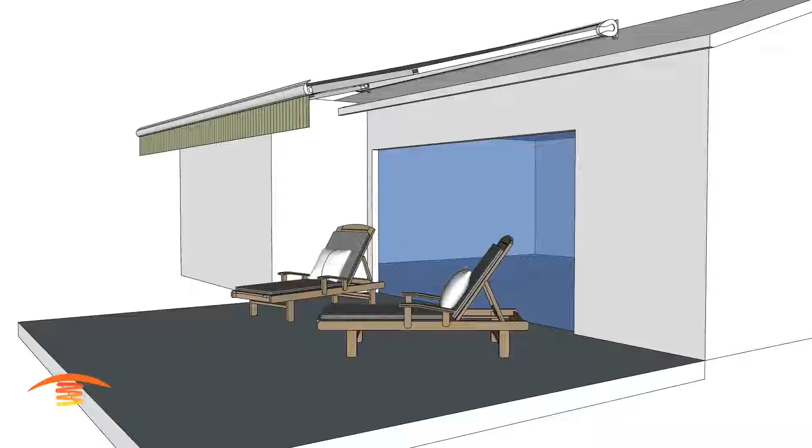This residential application, our goal will be how can we heat up this patio with this retractable awning? So let's go ahead and take a look at what our issues might be. The doorway here is a sliding door, so we're not concerned about that. But we do have this awning that obviously retracts, and there's a flap of material that comes down here, and it will also hang around this location here. So that's something that we need to be aware of.

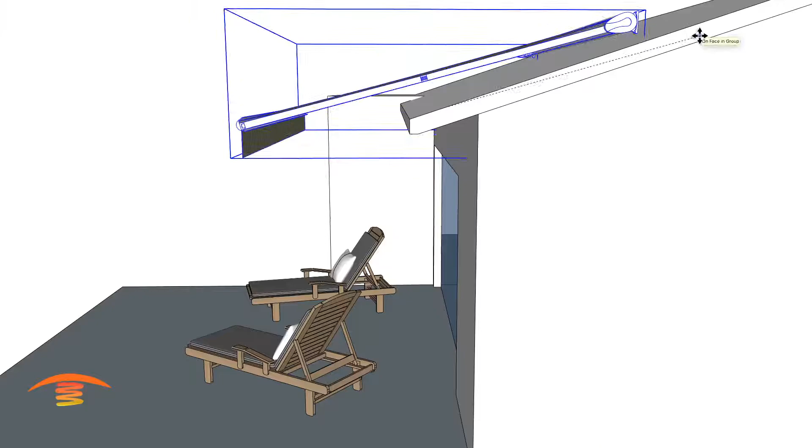Now, I don't have the actual dimensions of this part of the structure, nor do I have the height of this, nor do I have the position. I'm going to use my model this way. I know this isn't the way the awning moves up and down, but how this material moves and where its position might be. So I don't have all that information. So let's go ahead and just look at what we need to be aware of and concerned about.

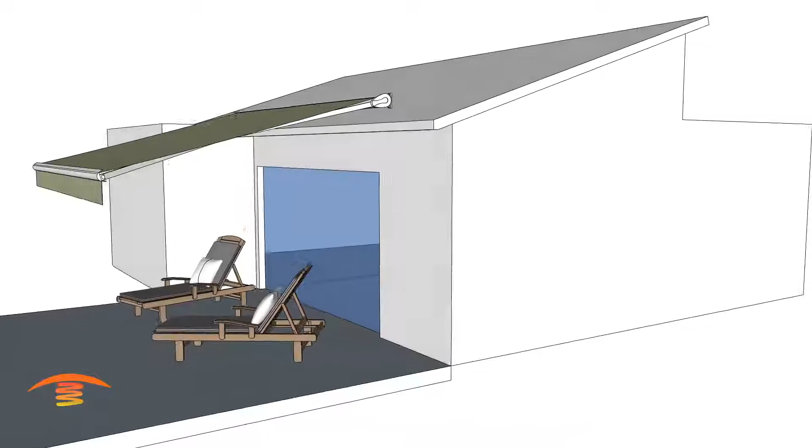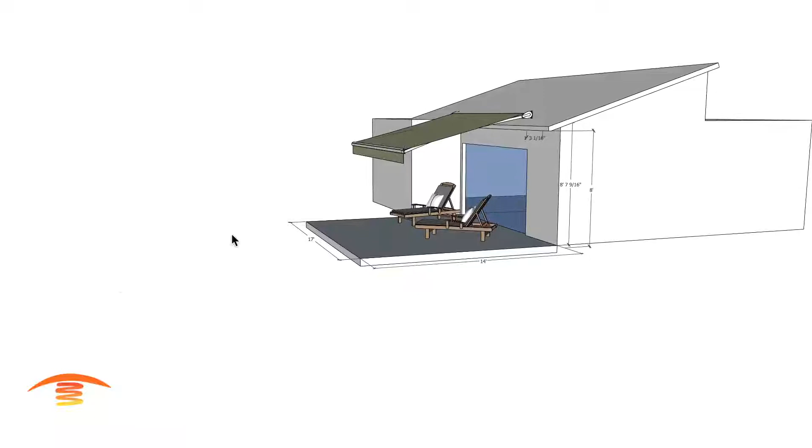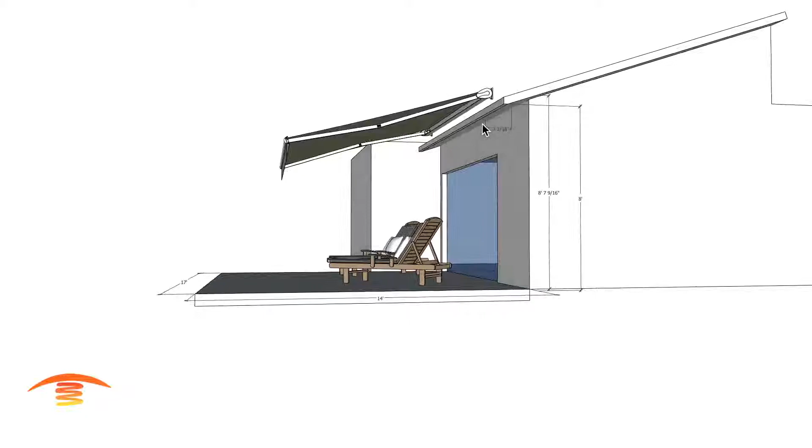All right, let's look at the dimensions of the overall space. I have the bottom of the eave at 8 feet off the ground, 14 by 17. This project is up on a hillside, I believe. They have a nice view. If you are on a hillside, then electric heaters would be the proper application, because you get a lot of breeze coming up here, and if you had a gas heater up here, then the gases will move around and not be efficient in their output of heat. So electric heater would be the proper heater.

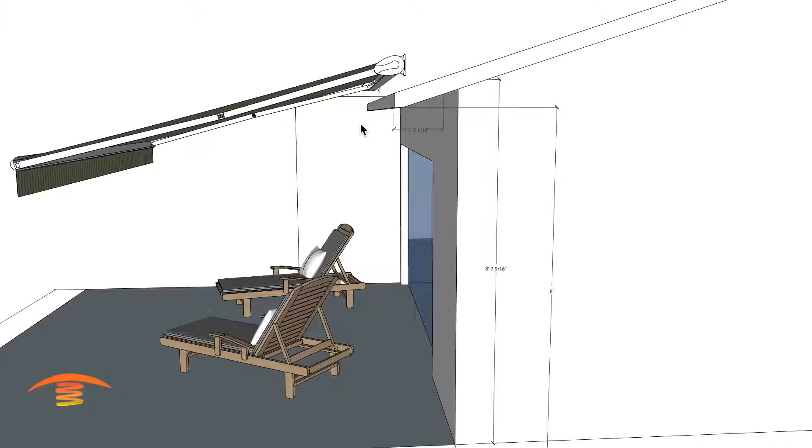Also, electric heaters have a reduced clearance, so that's a nice thing. Gas heaters, when you angle it out, generally have a clearance of about 17 inches, which is quite a bit, and the heater itself, its side profile dimension is roughly 8 by 8. So what other things do we want to mention?

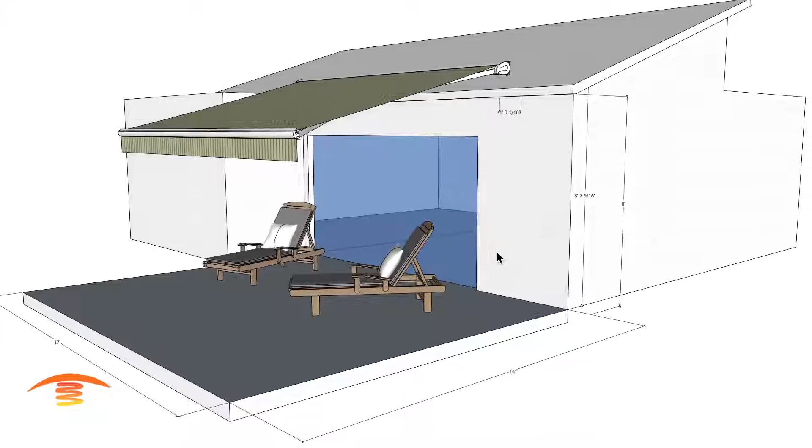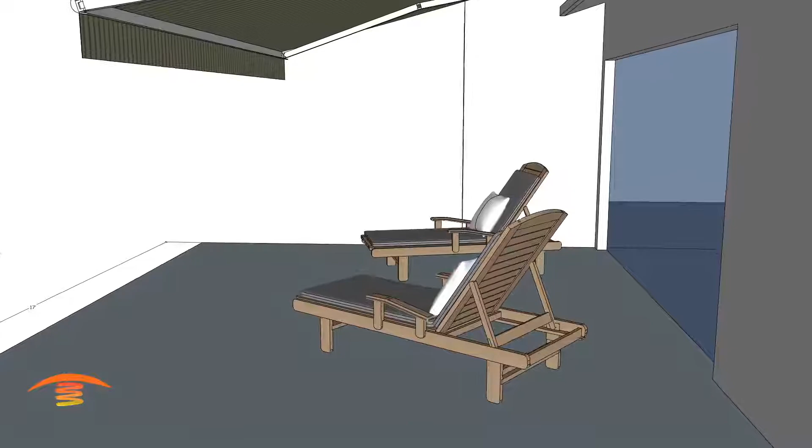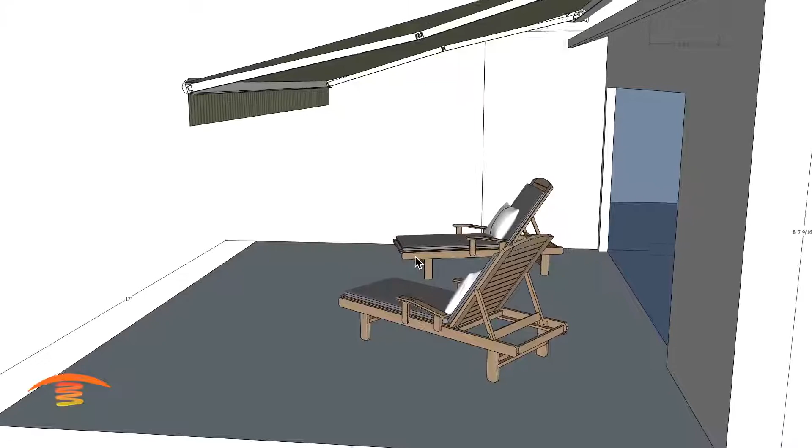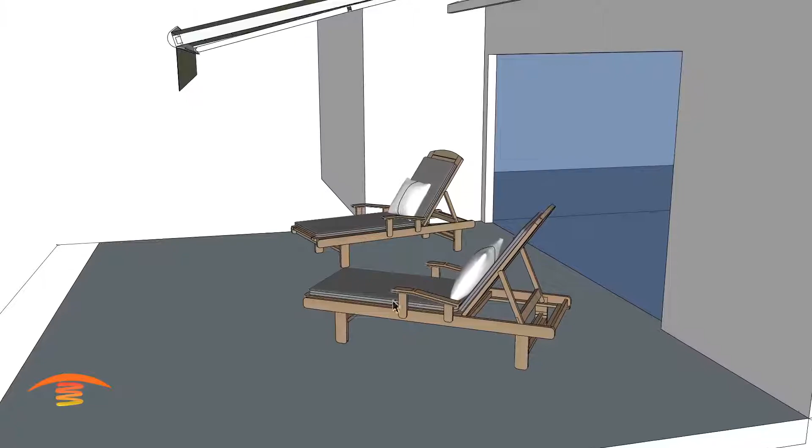We also want to talk about the fact that if you were sitting here in these lounges, for instance, then your body is going to be cooled by that breeze coming through here. If it's dead wind, obviously there's no breeze, but there is cold. But the more air movement that you have, the more you want to offset that by infrared heat. And sitting this direction, you're not really facing the heater, so your body is insulated back here and back here. In this application, it might be chairs and tables that this job has, but we're just going to use this as an example.

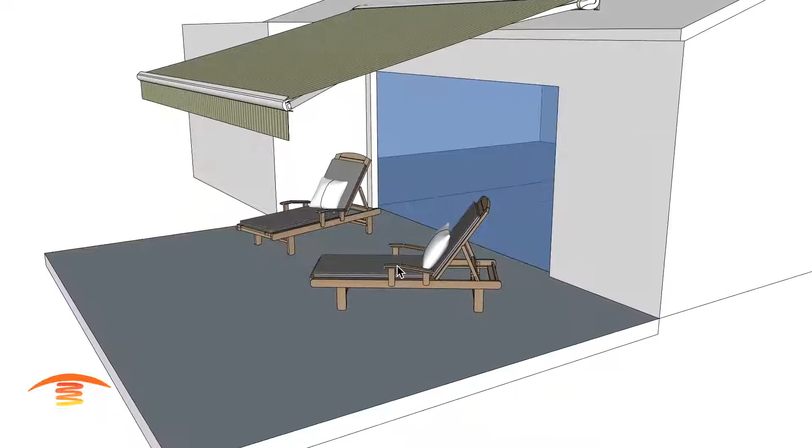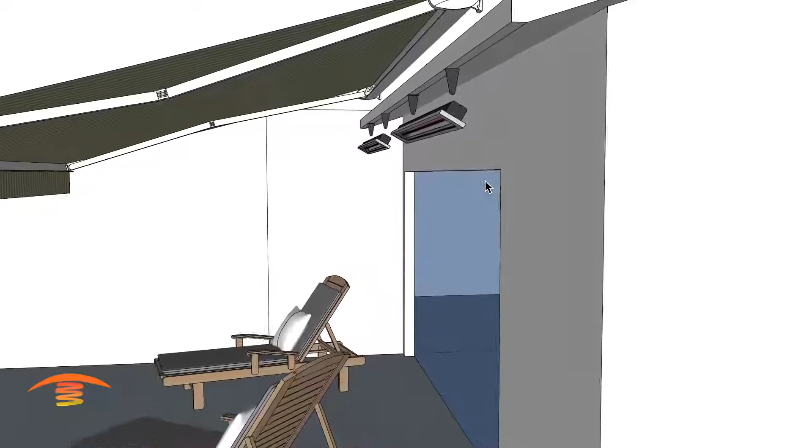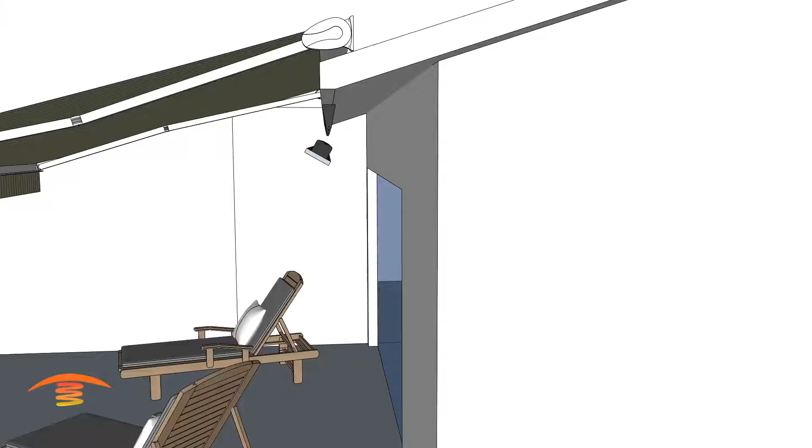So let's go ahead and look at what heaters you might consider. These are Infratech slimline units. I have them on extended brackets; I didn't extend the brackets down, but there are extension brackets you can purchase, with 2, 4, 6, and 8-inch extensions available. I have these at 30-degree angles, and let's look at the clearance below first. The clearance below is 18 inches from this edge out, and 18 inches out this direction. That's why I have the 30-degree angle. If I tilted it down a little further, I would be penetrating the wall here, and that would be an issue with the clearance, so we can't do that.

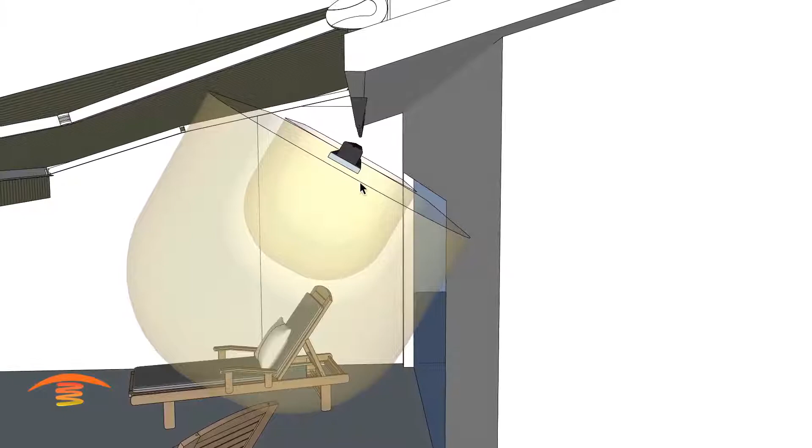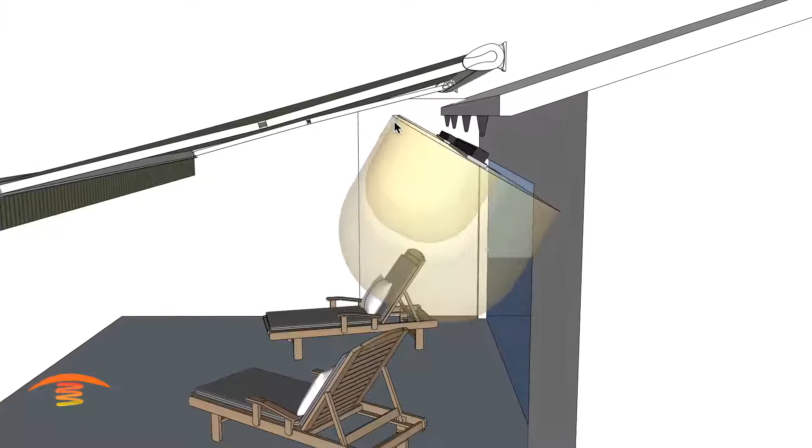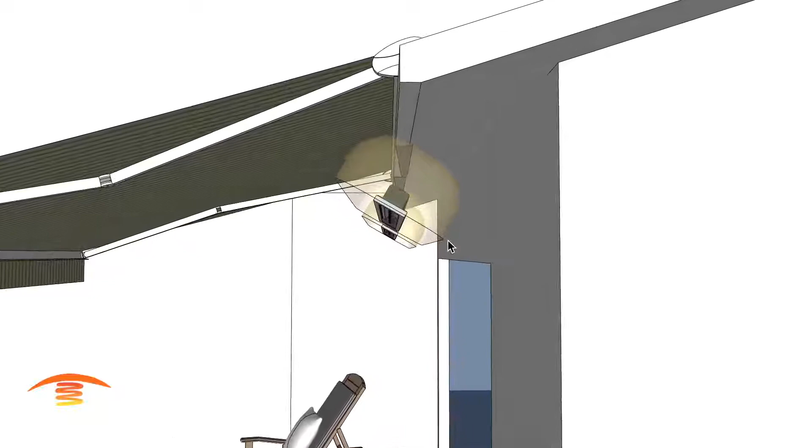Now, when this awning is raised, it does matter where this lines up. So if you were to not retract it fully, that is an issue. This is a safety issue that we need to be concerned about. Maybe moving it down another 2 inches with the 4-inch bracket would be a better answer. This is just an example of what we need to look at as far as safety when considering this type of application. The clearance above, again, is 6 inches from the edge, 6 inches from this edge, and again, the retractable awning could limit our ability to place a heater there.

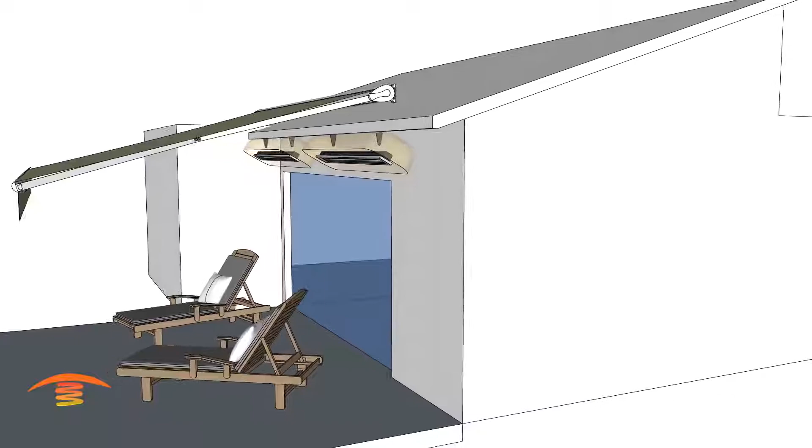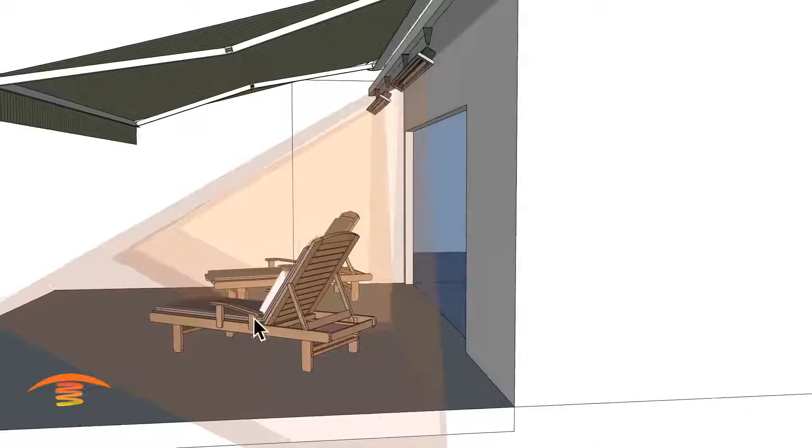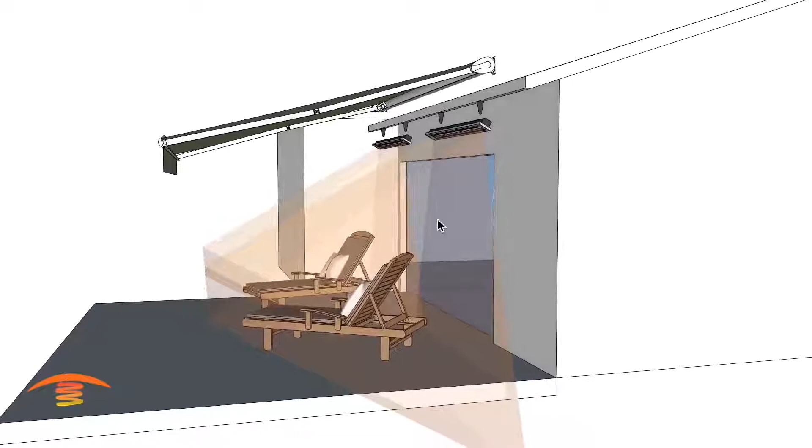So what else can we talk about here? Let's go ahead and look at the footprint of heat. You can see how the heater is projecting the infrared light wave out this direction. This is a light wave, so as it travels, it heats any mass: tables, chairs, floors, the human body. And being that you're insulated here, and the cold air will be coming from this direction, you really want heat on that side. It'd be better to have heat coming this direction, but obviously we can't do that here. So we are limited in how much heat we can actually produce.

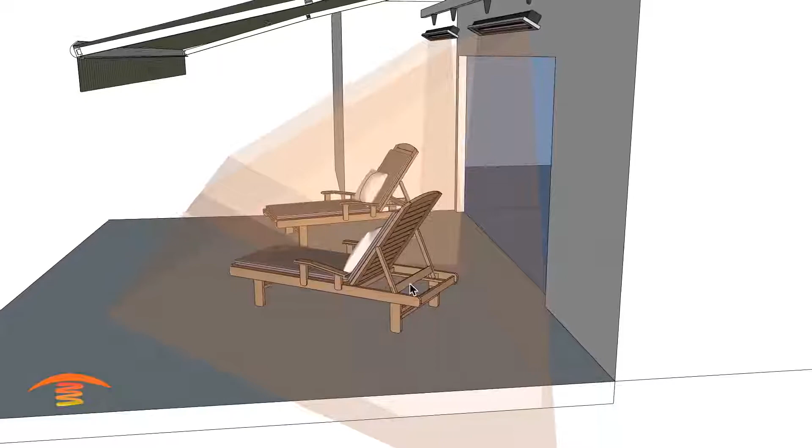From this edge here to outside is roughly about 6.5 feet, and you're not going to really feel warm in this area here. This is the maximum throw. As light waves travel through space, they diminish in intensity, so I would not expect a lot of warmth over here. So we're only going to receive heat really below the heater itself, maybe 6 feet out from the wall.

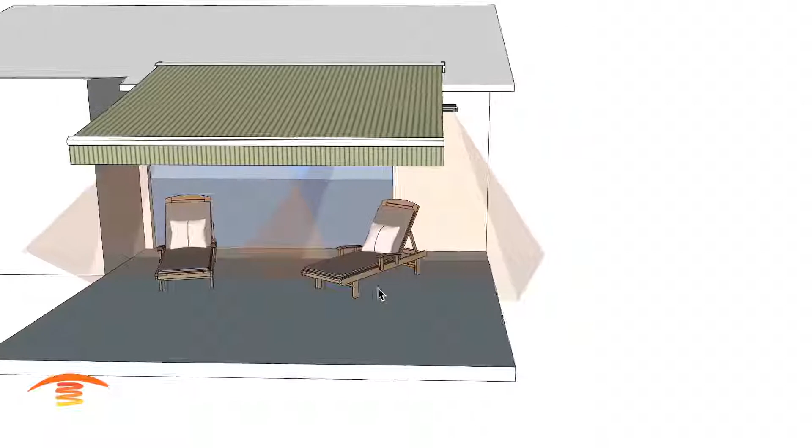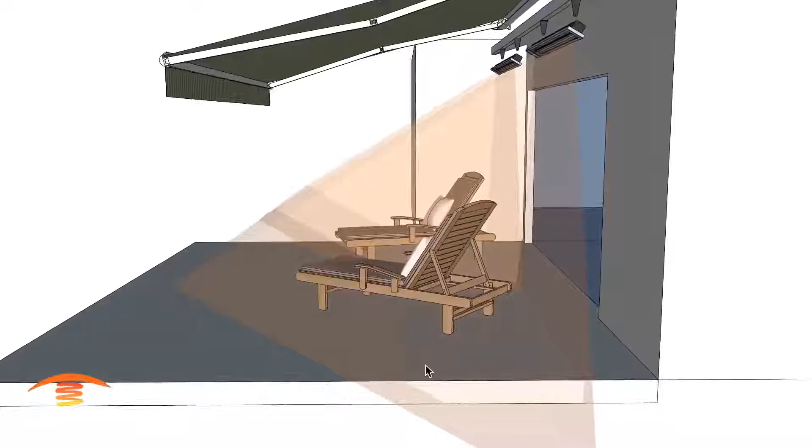This customer asked for heat for just a 12 by 12 area, and obviously we're over extending that. We have that 17-foot span here, and the heat ray comes a little further. But if we were to just place one unit here, you would roughly get about a 10 to 11 foot throw this direction, and then off the wall, like I said, about 6 feet, maybe 5 feet comfortably.